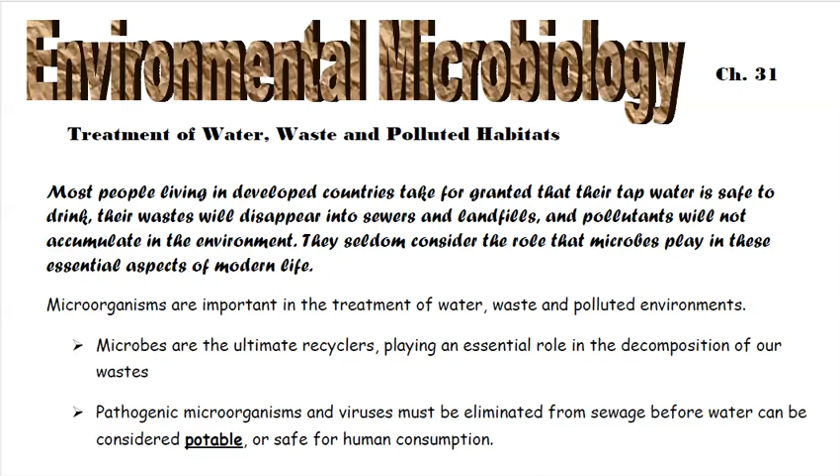Wastewater, or sewage, is composed of all the material that flows from household plumbing systems, including washing and bathing water, and everything that goes down your toilet. If untreated sewage is released into a river or a lake that is then used as a source of drinking water, disease can easily spread. If marine waters become contaminated with untreated sewage, consumption of the shellfish that live and grow there can result

in disease as well. Americans use about 150 gallons of fresh water per day, and we produce about 120 gallons of wastewater per day and about 5 pounds of trash per day. The biochemical oxygen demand, or BOD, is the amount of oxygen required to biodegrade the waste in the water. BOD of raw sewage is approximately 300 to 400 milligrams per liter, which could easily deplete the dissolved oxygen in the water receiving that sewage.

BOD directly affects the amount of dissolved oxygen, or DO, in rivers and streams. The greater the BOD, the more rapidly oxygen is depleted in the stream, so it's an inverse relationship. More BOD means less DO. In order for organisms to survive, they have to have enough dissolved oxygen, so less oxygen is available to higher forms of aquatic life. The consequences of high BOD are the same as those for low dissolved oxygen. Aquatic organisms become stressed, they suffocate, and they die.

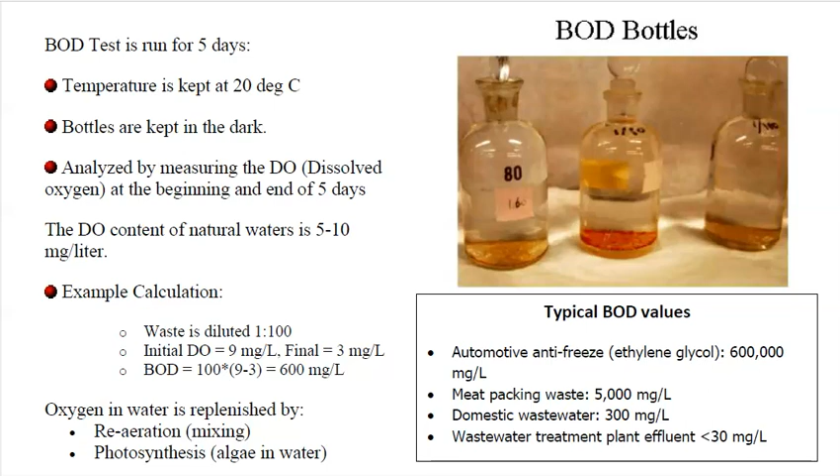Okay, so sewage treatment. You do need to know the major processes in sewage treatment. In the US, we use this two-series process. Typically, we do a primary treatment and a secondary treatment. Any advanced treatment is optional based on the municipality or location. Primary treatment removes about 50% of the solids and about 25% of the BOD. Secondary treatment eliminates up to 95% of the remaining BOD.

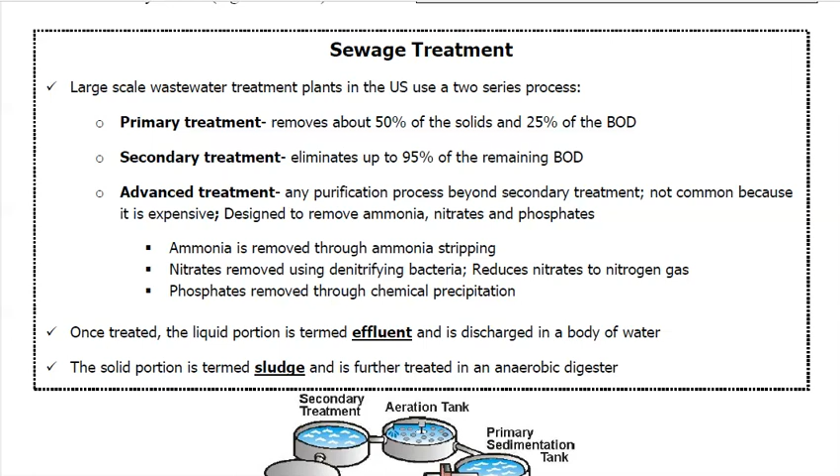Advanced treatment includes purification processes that are not common and expensive. Some are designed to remove specific things like ammonia, nitrates, and phosphates. Once we've treated the water, the liquid portion is called effluent, and it's discharged into a body of water. The solid portion is termed sludge and is further treated in an anaerobic digester. Whatever is left after that can be buried in the landfill.

Primary treatment is the physical process of removing materials that settle out of the liquid. This is things like toilet paper and Barbie doll heads that got flushed down the toilet. This treatment removes about 50% of the solids. The sewage passes through a series of screens to remove the objects.

Skimmers remove scum and floating debris on top of the wastewater. The sewage is allowed to settle in what's called a sedimentation tank. This facilitates the removal of the solids. The sludge is removed after settling is complete, and the primary sewage that remains is then sent for secondary treatment.

Secondary treatment is primarily a biological process. It's designed to convert the suspended solids to inorganic compounds and cell mass for removal. This eliminates nearly 95% of the remaining BOD. Microbial growth is encouraged during secondary treatment. Aerobic organisms degrade the organic material to carbon dioxide and water. Methods used in secondary treatment include activated sludge, trickling filters, lagoons, and artificial wetlands, and we're going to go through each of those.

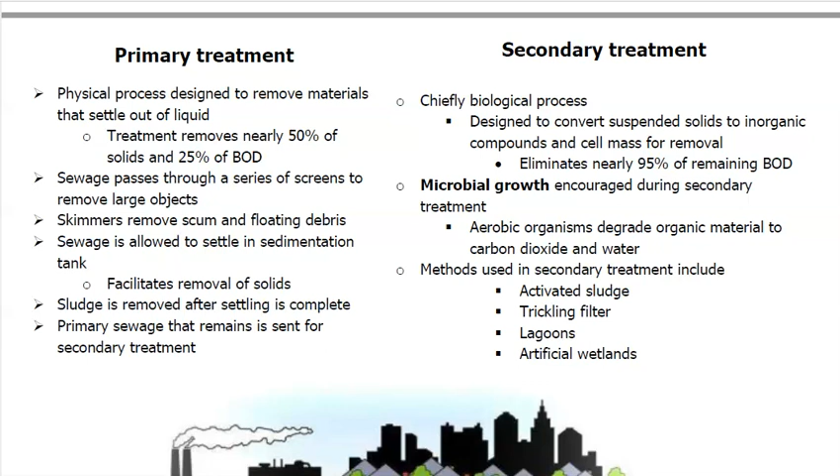Activated sludge is a wastewater treatment system that uses a variety of aerobic microbes. These organisms grow in biofilms, which we call flocs. A large number of organisms are inoculated into the sewage via addition of small amounts of leftover sludge from the time before. Oxygen is supplied and the organic matter is converted to biomass, or the waste product.

The sewage is sent to the sedimentation tank. The flocs settle out and the resulting sludge is removed. A portion of that sludge is used for the next batch.

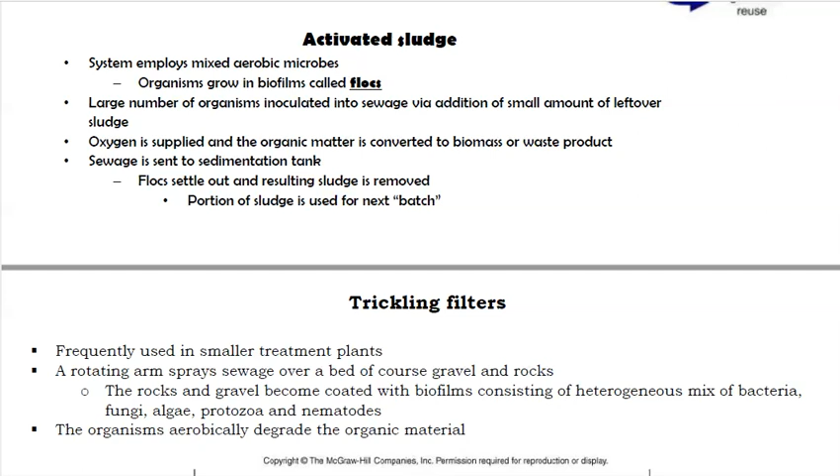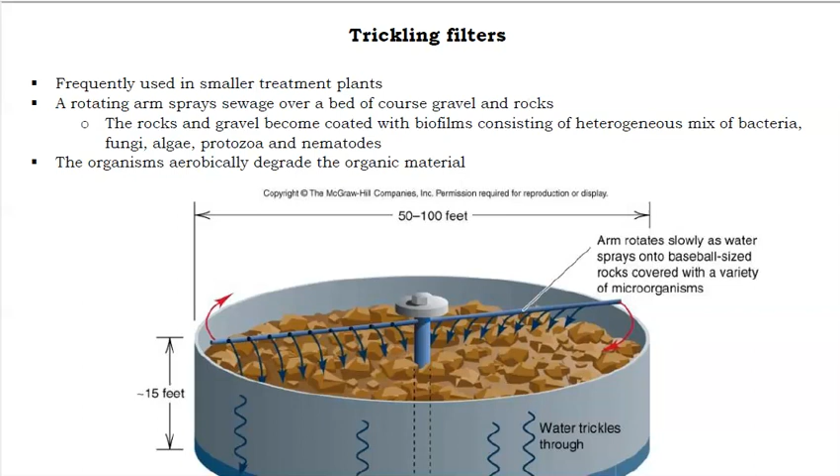Trickling filters are frequently used in smaller treatment plants. A rotating arm sprays sewage over a bed of coarse gravel and rocks. The rocks and gravel become coated with biofilms of a heterogeneous mix of bacteria, fungus, algae, protozoa, and nematodes. The organisms will aerobically degrade the organic material.

So in this case, the water came in from primary treatment here. It comes up through these tubes. It's going to spray down over the gravel and the rocks where all the microbes are. And the microbes are going to break down that waste, that organic matter. The cleaner water is going to filter down to the bottom. And then it's going to either go to an advanced treatment or back to a natural system like a river or a lake.

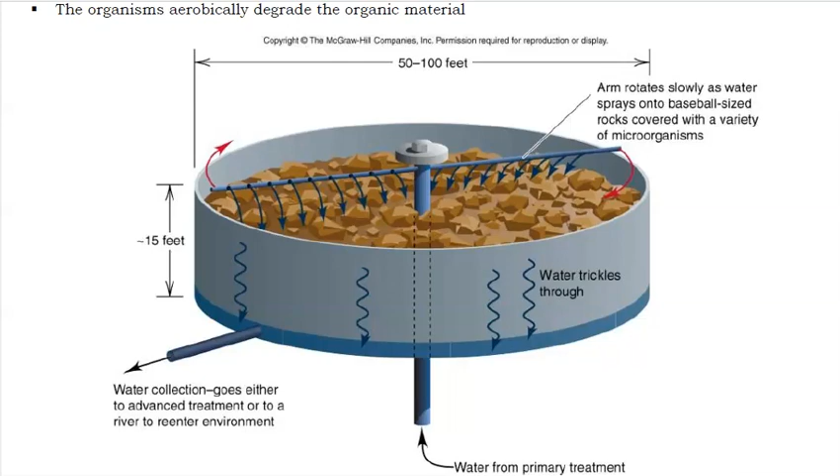Artificial outdoor lagoons can be created as well to treat wastewater. The sewage is channeled into shallow ponds or lagoons, and it remains there for a specific period of time. Algae and cyanobacteria grow on the surface to provide oxygen, which enables the aerobic microbes to degrade the sewage.

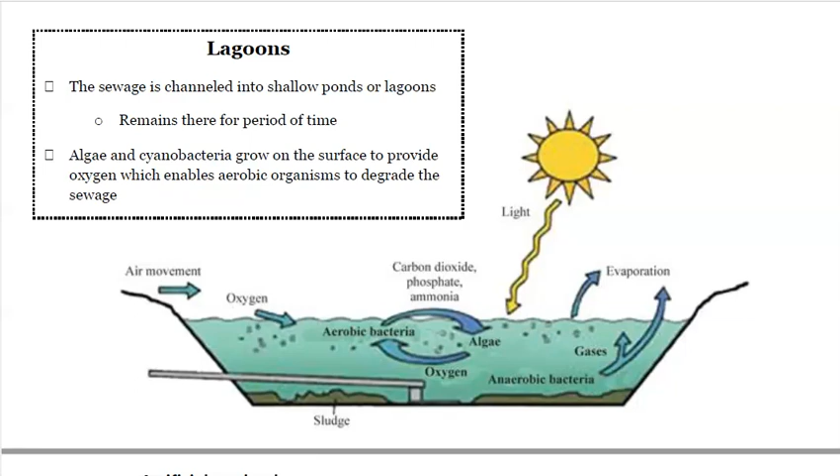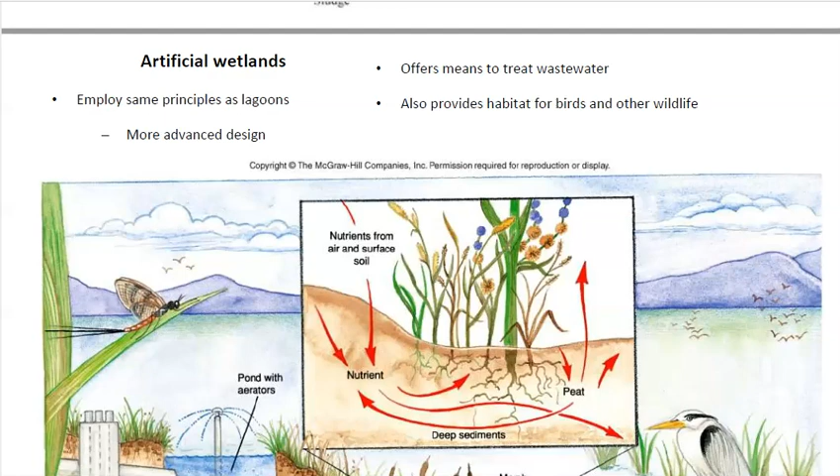And then the last type of water treatment we're going to talk about is artificial wetlands. These are really cool. They're kind of like lagoons, but they have a more advanced design. They provide habitat for birds and other wildlife that's safe. So first, the sewage is aerated to stimulate the aerobic organisms that break down the waste.

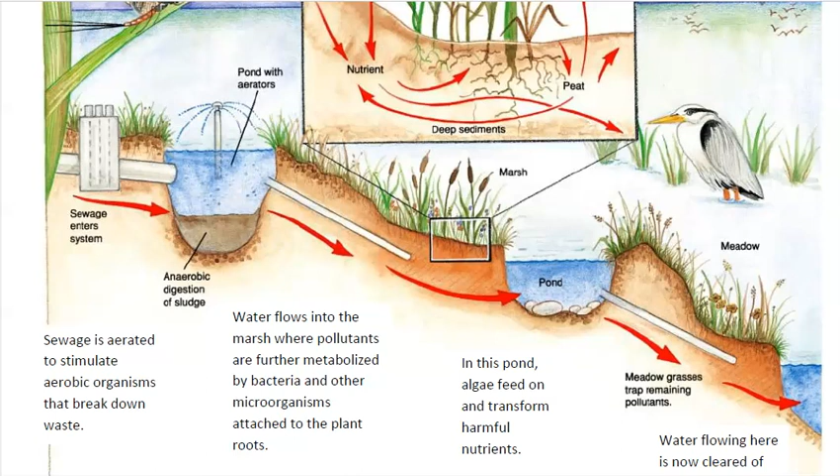Water flows into the marsh, where the pollutants are further metabolized by bacteria and other microbes that are attached to the plant roots. In the pond, algae feed on and transform the harmful nutrients. The meadow grasses trap pollutants that are flowing down. And then water flowing all the way down to this area is now cleared of pollutants and carried into a lake, stream, or river.

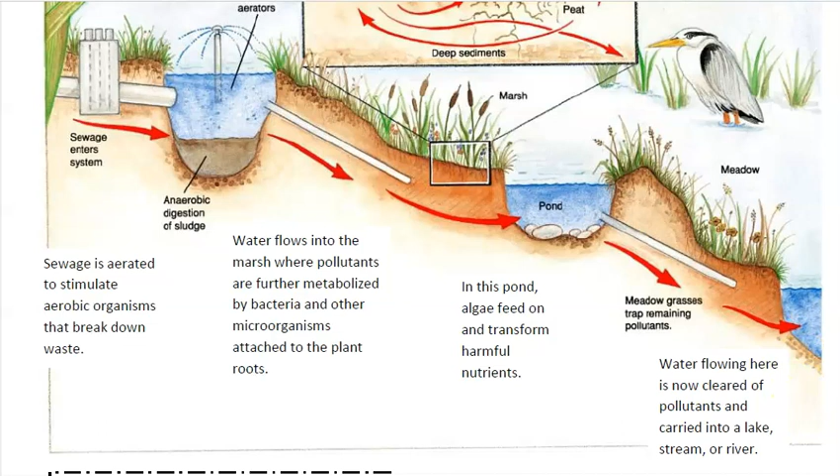So typically, right after secondary treatment, but it's not technically tertiary treatment, is when we disinfect the water. So at any municipality, they're going to use one of these types of disinfection techniques before they discharge the effluent back into a body of water. So they can either use chlorine, ozone, or UV light, ultraviolet light, to kill microbes and viruses in the water before sending it back to a natural system.

The anaerobic digester: microbes break down the biodegradable material in the absence of oxygen, anaerobic. Many treatment plants use generated methane to power their equipment. The remaining sludge is dehydrated, so the water is removed to form stabilized sludge, which is a nutrient-rich product. It can be incinerated or burned, placed in the landfill, or even used as fertilizer to improve soils.

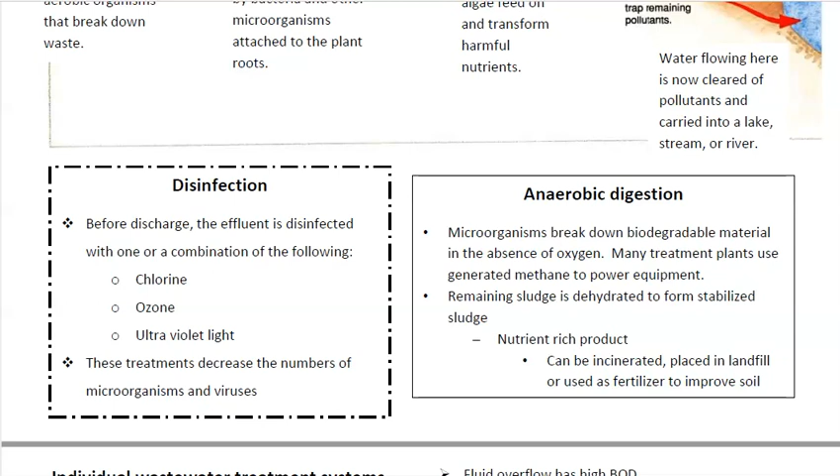So let's say you live outside of the city limits and you're not on a sewer system. If your house is further out and you're not near a sewer, you're going to have a septic tank for your sewage disposal. Wastewater is collected in a large tank that's buried under the ground somewhere around your house. Sometimes it's in the front yard, sometimes it's in the side yard, sometimes it's in the backyard. It all depends on the landscape.

The solid material is going to settle down to the bottom, and it's going to be degraded by organisms. The fluid overflow has a very high BOD, so it must be passed through a drainage field in order to increase the dissolved oxygen and decrease the BOD before it goes back down into the groundwater.

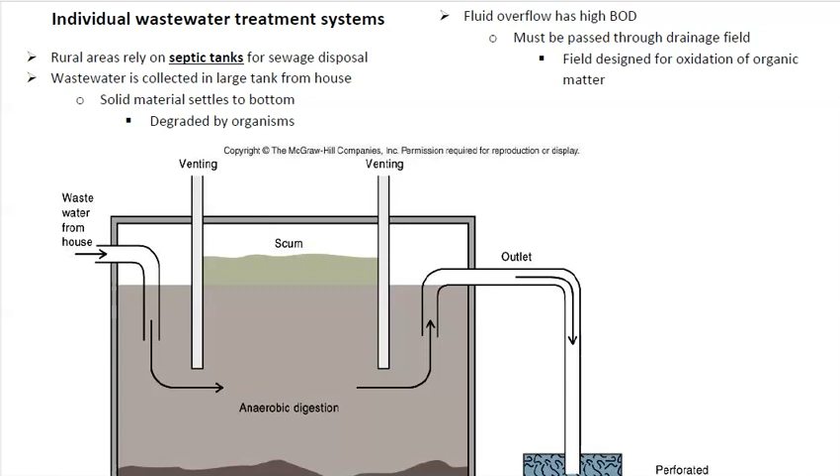So you have water entering the septic tank from your house. This is going to be all your toilets flushing, your sinks draining, all of that. You have vents because a lot of the bacteria are going to be aerobic at the top here, and so they need air. You're going to have scum that kind of builds up at the top. All the solids fall to the bottom. So eventually, you're supposed to get your septic tank sucked out every 5 to 7 years because it will fill up with that solid material.

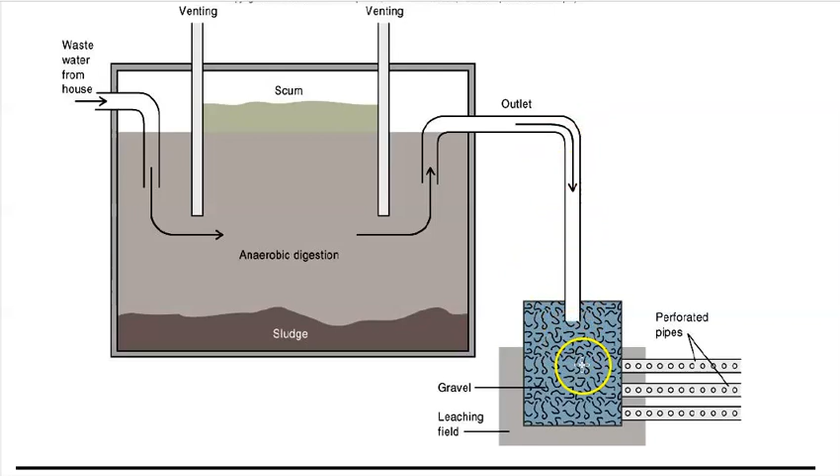And so the water is going to go through an outlet. It's going to go through a drainage field that's basically lined with gravel and sand, and it gets filtered further through the leach field, which is also in your yard. It's underneath the ground. And it's going to eventually just seep back out into the underground system and eventually back to the underground water table.

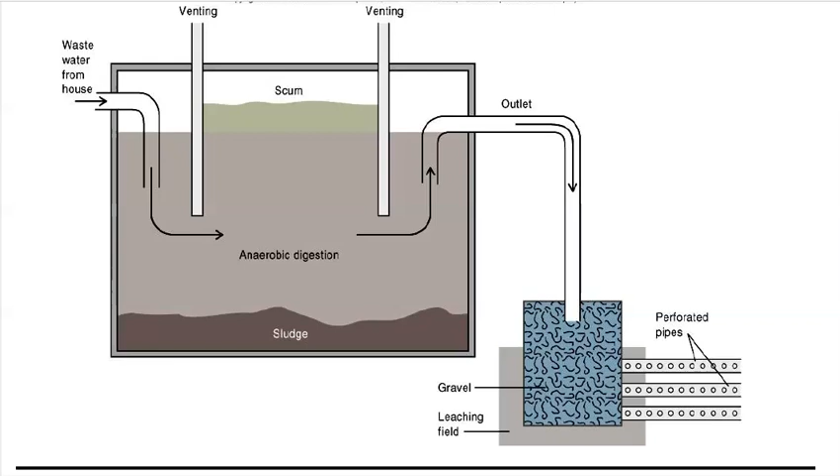Okay, drinking water. It's so important that our drinking water is clean, or else we could end up with a number of diseases: dysentery, diarrhea, giardia, you name it, it can be in the water. Large cities generally obtain drinking water from surface waters like lakes or rivers. All of our water comes from Lake Lanier.

Surface waters may act as receiving waters for sewage effluent as well. So once our sewage goes through one of our treatment plants, it does get dumped back into Lake Lanier. So Lake Lanier receives our, quote, cleaned effluent sewage water, right? But then we're also pulling from Lake Lanier for our drinking water. So when we pull for our drinking water, it goes through a whole different process in order to make it potable for us to drink and safe.

Smaller communities often use groundwater as a drinking water source. Like you can use a well. If you have a well dug down and you get water from the well, then you're not using water from municipalities. The primary concern regarding safety of drinking water is the possibility of gastrointestinal pathogens. It's not feasible to test for all of these pathogens in the treatment process, so they test for indicator organisms that are routinely found in feces.

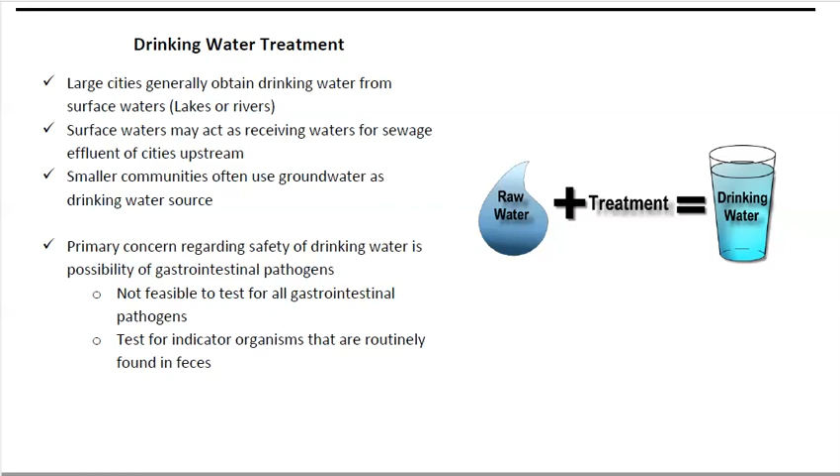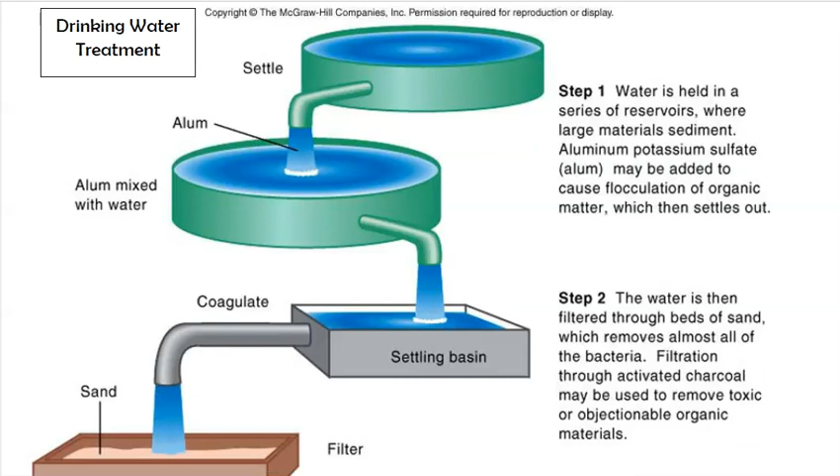All right, step 1. Water is held in a series of reservoirs where large materials will sediment down. Aluminum potassium sulfate, which we call alum, may be added to cause flocculation of organic matter, which then also settles out in the settling basin. The water is filtered through beds of sand, which removes almost all the bacteria. Filtration through activated charcoal may be used to remove toxic or objectionable organic materials.

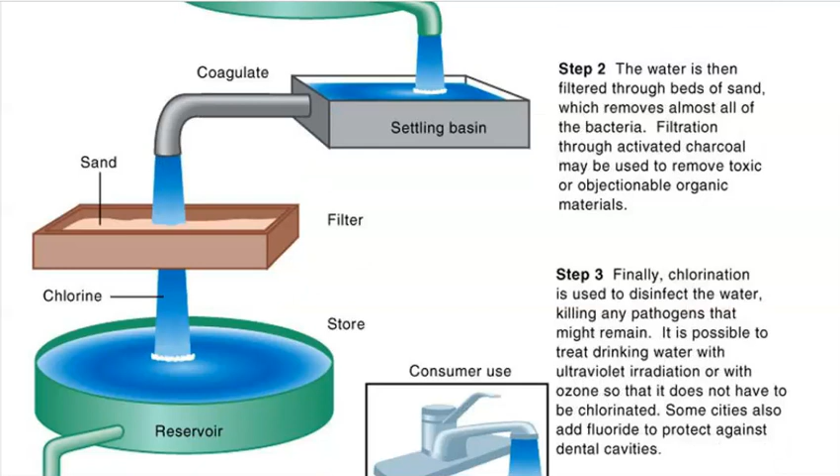And finally, in step 3, chlorination is used to disinfect the water, killing any pathogens that might remain. It's possible to treat drinking water with UV radiation as well, or with ozone, so that it does not have to be chlorinated. Some cities also add fluoride to protect against dental cavities. And then it comes through your faucet.

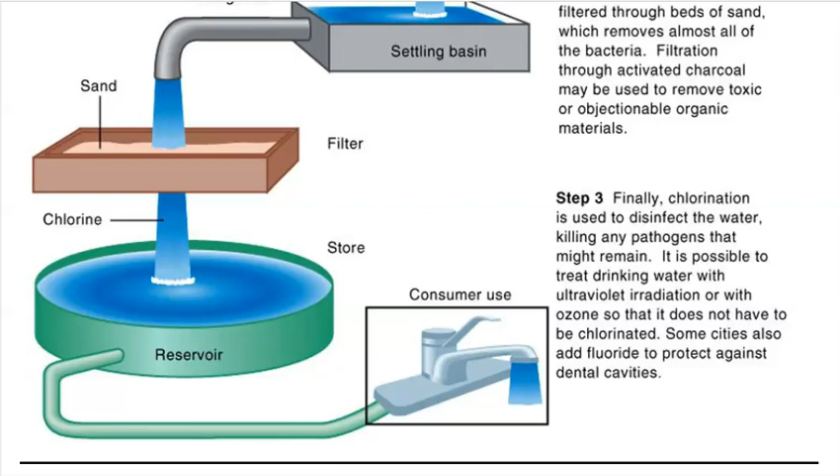For our solid waste, like the trash that you fill up in your trash cans in the kitchen, we typically use sanitary landfills. They are widely used to dispose of non-hazardous solid waste. The manner that minimizes damage to human health and the environment, obviously, is ideal. It must be located away from sensitive areas, like agricultural sites. The site is excavated, which means you dig out all the dirt, you line it with a really thick plastic membrane over a bed of clay, because clay is really thick, which will minimize the leaching, which is the draining of that waste as it breaks down, going down into our drinking water.

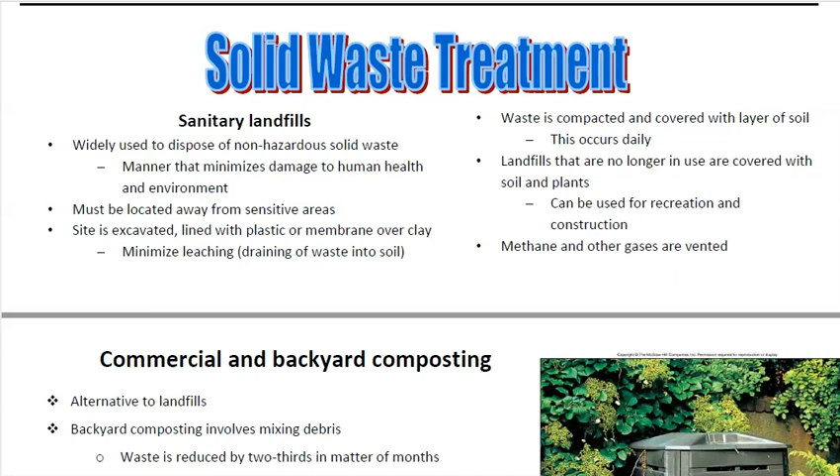Waste is compacted and covered with layers of soil; that typically occurs daily. Landfills that are no longer in use are covered with soil and plants and can then be used for recreation or construction. Methane and other gases are vented, so they put these giant pipes down in the ground so that any buildup of gases underneath all those layers can escape and it won't cause an explosion. Bacteria and fungi are important in solid waste being broken down faster as well.

A healthy alternative to landfills would be composting. You can do backyard composting, or we can have commercial composting, which just means on a larger scale. Backyard composting involves mixing debris. Waste is reduced by 2/3 in a matter of months. The black organic material can then be used in your garden beds as fertilizer. The compost pile usually starts with a supply of organic material. Often some soil and water are then added.

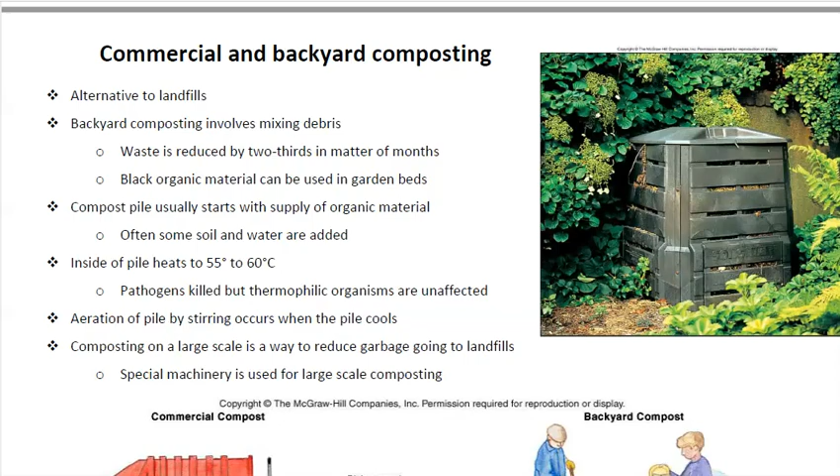The inside of the pile can heat up to like 55 to 60 degrees Celsius, which is really hot. Pathogens are killed, but the thermophilic organisms are unaffected. Aeration of the pile by stirring occurs when the pile cools down. And composting on a large scale is a way to reduce garbage going to landfills, but special machinery is used for large-scale composting. So large-scale composting takes a little bit longer. They typically let it cure in piles for about 18 months before they actually bag up that compost and then resell it as fertilizer.

Backyard composting, though, is pretty simple. You can do it in a number of different ways. So in our backyard, we actually have 2 different compost systems. We have one that's just a big pile, and we have it surrounded with a gate, and we throw the yard waste in there, like twigs and leaves and pine straw, and then you can throw some kitchen waste in there, but you don't put any meats or dairy or fats in there. So you put like veggies and fruits and peels, like banana peels and orange peels, and so you mix all of that in there, and you mix it up. Typically, once a week is good.

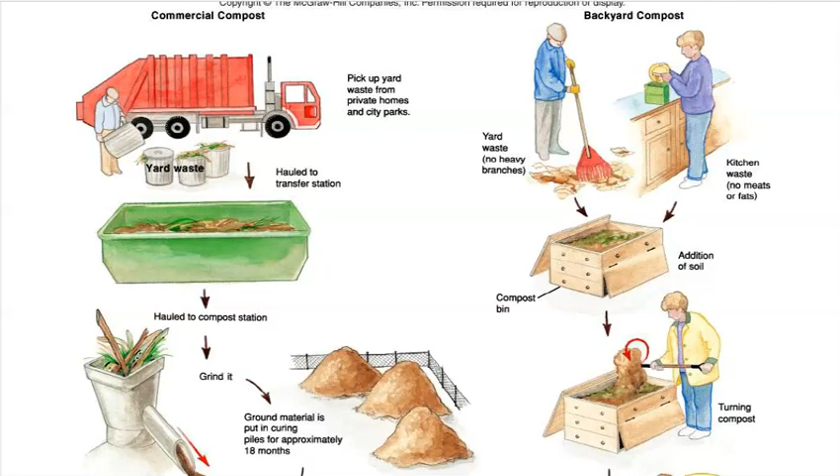I also have a rotating drum compost system in the backyard, where we spin it around, and so it's a lot easier to rotate and aerate and get some air in there. And every time I find some worms in the backyard, I add them in there. So when you add worms to a compost, it's called vermicomposting, and the worms will help the bacteria to break down all of the organic matter. And eventually it turns into nice fertilized soil that you can put back into your yard for your veggies and your plants.